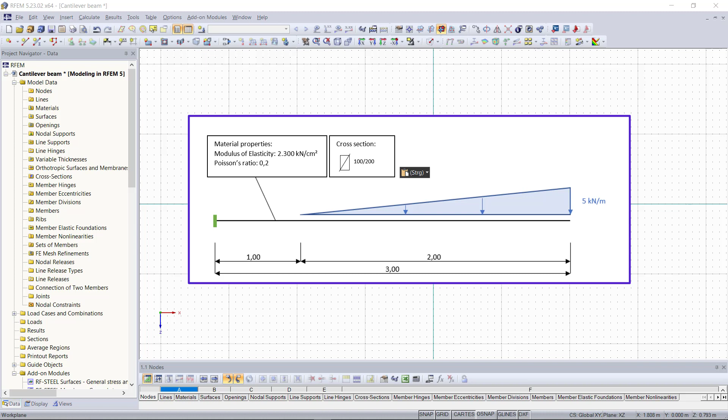Hi guys, and welcome back to our second part of modeling in RFEM. As previously announced in the first tutorial, we are going to create this cantilever beam, this time using the dialog options in RFEM for modeling.

To begin with, we can access all dialogs in the project navigator on the left side of the screen by right-clicking on the respective tabs or folders. Or we can access these dialogs using the insert menu up here as well. For instance, if we choose model data and select materials, you can see the option dialog box here. Within this tutorial, I am going to use mostly the project navigator for opening up these dialog boxes.

And again, we will start with the nodes of our beam element. For that, we go up here on the nodes folder, and with the right click, we choose the option new node. Then this new dialog appears, and just like in the first tutorial where we did use the tables for creating the nodes, we are going to enter the coordinates of our nodes depending on a reference node. This will be the origin, and we are going to place the first node here, so the coordinates of this node will be 0 and 0. Then we click OK, and we do exactly the same for the second node.

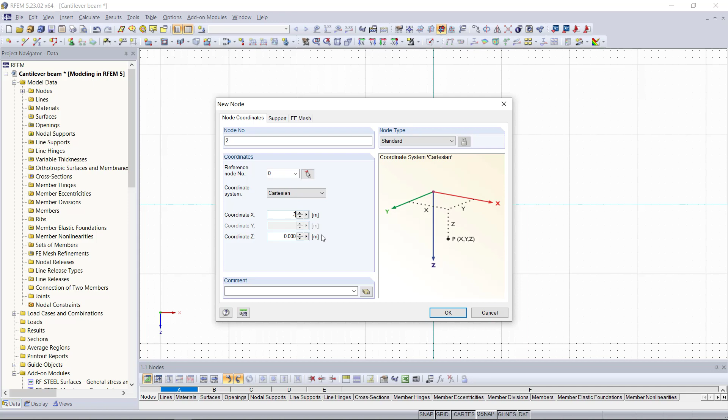Right click on the Nodes tab and choose New Node. The coordinates for the second node, we enter here 3, which defines the endpoint or the length of the beam. Again, we hit OK, and then we can see that the nodes are set in the graphical area.

So now to connect these nodes with the line in between, same procedure once again. With the right click on the Lines tab, in the project navigator, we open the dialog box for a new polyline. At the top up here, we can define the number of the line. Since we just have one line, this will be the first one.

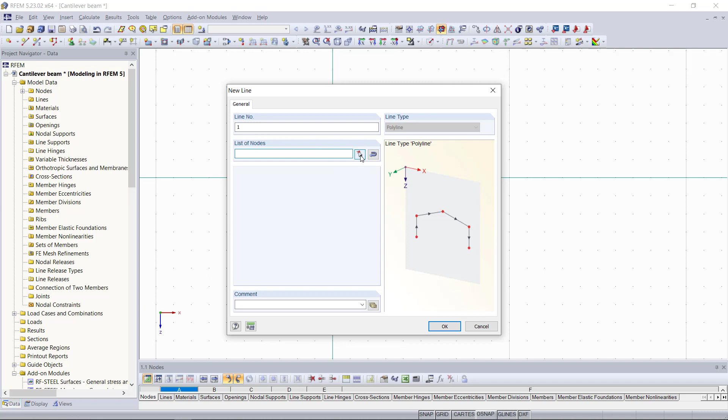In the section below, we select the nodes to be connected, and we can either type in here 1, 2 for our 2 nodes, or if you have a more complex model and you don't know the numbers of the nodes, there is also the option to select the nodes graphically, if we click here on the cursor button and select the nodes out of the graphical area.

Next, we will continue with defining a material. Let's say again, just as an example, we enter here material 1 like in the first tutorial. Then we will enter our characteristic values from that example. Again, you will notice that after entering the modulus of elasticity and a Poisson's ratio, the shear modulus is automatically determined. We can close this by clicking OK.

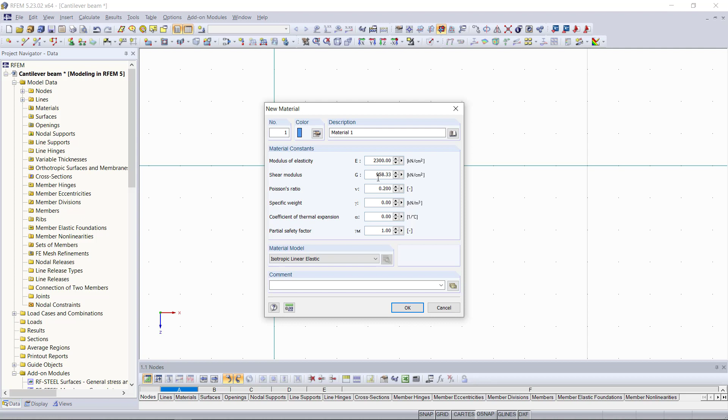Now we are going to set the supports, and once again we can find in the project navigator nodal supports, and with right click we will open the dialog for that. So a cantilever beam is one of the basic types of beam elements, and remember this type is characterized to be a statically determinate system. For that we need 3 support forces or reactions as a minimum.

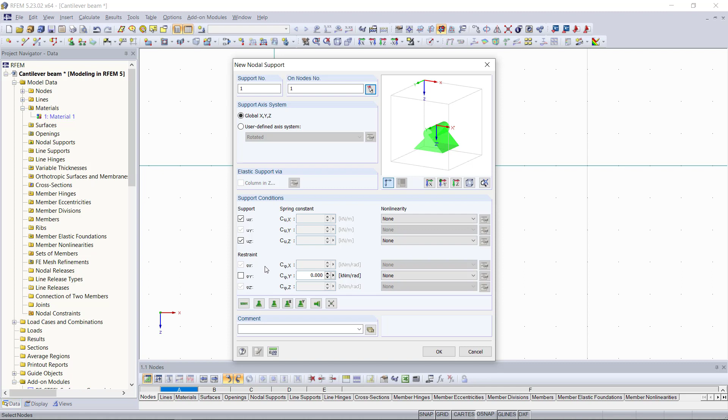Since this beam is supported at only one end, we have only one actual support here, which is going to be our first node, and at that support it has to have all of those reactions. For that, the support conditions here will restrain the beam horizontally and vertically. If we don't have anything else, it'll be allowed to rotate, and we don't want that, so we lock the rotation around the y-axis here. The graphic at the upper right corner gives you a nice visual illustration for that.

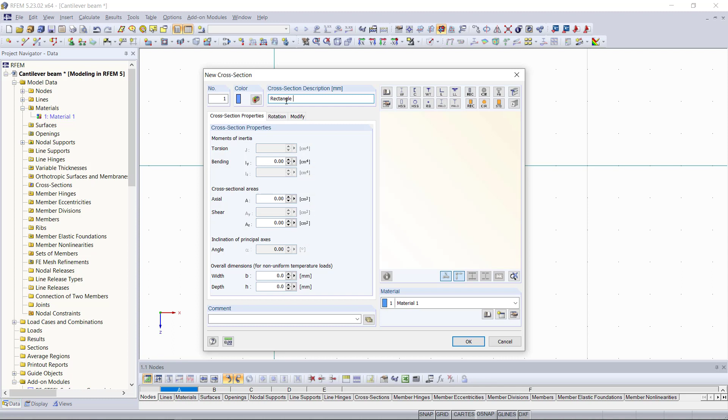Then we can click OK, and next we need a cross section for our beam element. In this dialog, we can either open up the library if we hit this symbol here, or we can just type in the cross section as well. Let's say we enter here rectangle, which will have a width of 100 and a height of 200, same as the one in our first tutorial. We can see below the cross-section properties, and down here we can choose the material for this cross-section, which will be our defined material 1.

Now that our cross-section is defined, you will notice that it's blue here in the project navigator. This is because it doesn't have a member to it yet. To assign it to a member, we can go to the members folder, and right-clicking on members, we select new member. Within this dialog, we can assign up here the member to a line. We can either type in here line 1, or once again we can assign the line graphically.

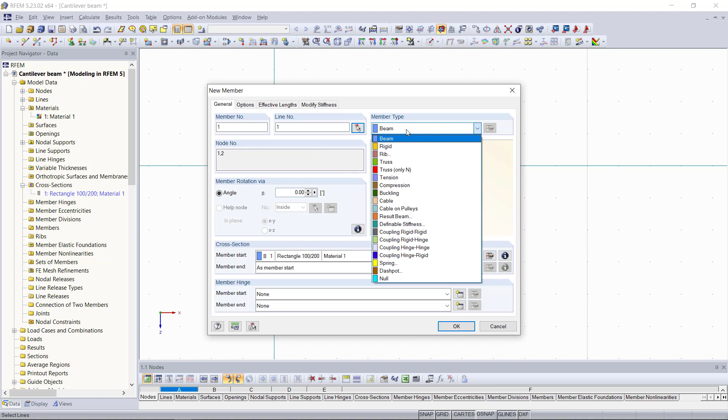Next, within this drop-down option here, we can select the member type. For now, we are going to keep that as a beam. And below that, there is the option to rotate the cross section as well. If we click, for instance, here, we can see this rotation here in the graphic on the right side. Moving on down here, we can assign the cross section for this member, and we'll keep that for the member start and the end the same.

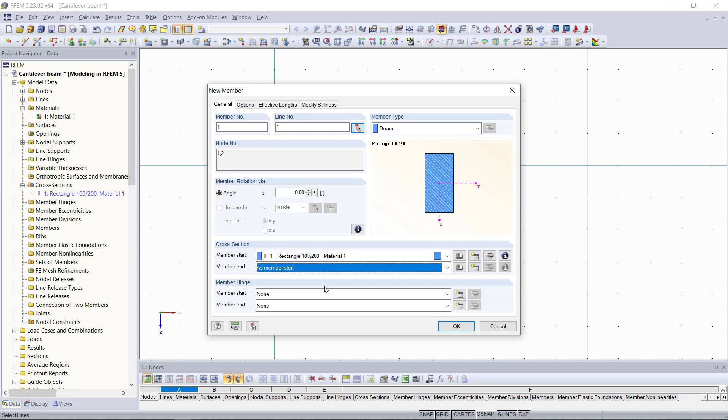We can also add member hinges, but we don't need that for this example. So we click OK, and if we turn off the wireframe model, you can see in the graphical area the cross section has been rendered.

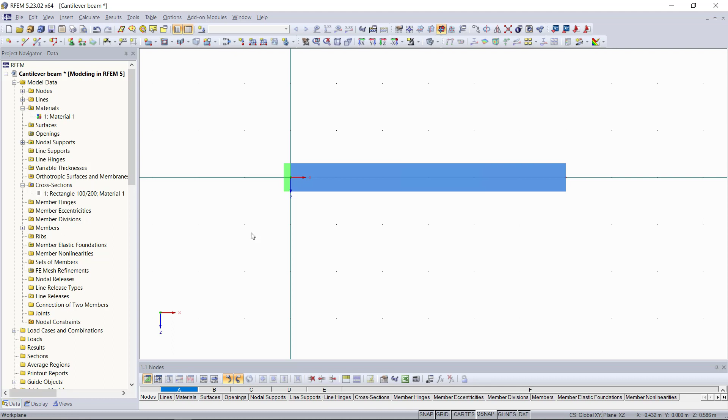Now that we have all model data that we need, we can move on to the load cases and the loads we'd like to apply. Remember, before assigning any loads, we'll have to define a load case. We can do this by going to the load cases and combinations folder in the project navigator. With right click on the load cases, we choose new load case, and you can see in this dialog the program has already created our first load case.

Within this tutorial, we are going to have only one load case, so we can keep that and choose all loads here. Then we can deactivate self-weight because we don't want that to be taken into account for the results later.

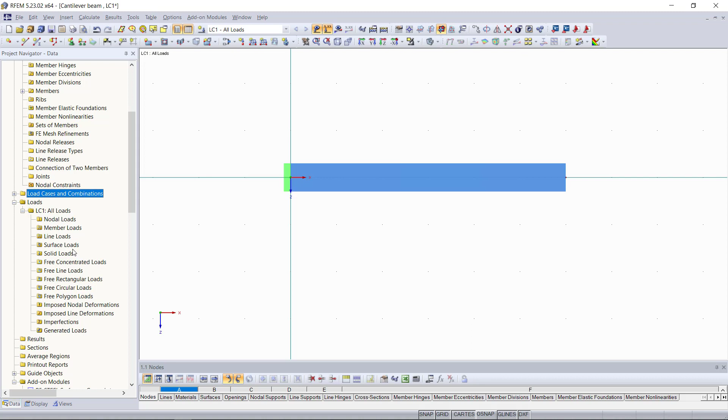Next, we will continue with the member load, and if we expand the loads tab in the project navigator, you will find for every load case that you have created a new folder. Since we just have one load case, we will expand this one here, and you can see here the options for different loads like nodal loads or surface loads and so on. We will choose a member load and open up the dialog for that.

The load type here, we're gonna keep that as force, and for the load direction, we can keep that as the global member length in the Z direction. For this example, we are going to apply a triangular load, and for this we use a load distribution of trapezoidal. We can see up here on the right side how this load is applied on our member, starting with a load P1 and ending with a load P2. We can find these parameters down here in the section load parameters.

Since we want to have a triangular load distribution, we can keep P1 as 0, and we can enter here for P2 5 kilonewtons per meter. For this example as shown, we don't want the load to be applied over the entire member length. And to do this, down here there is this option, we can turn this off, and we can set where our load will be on the member.

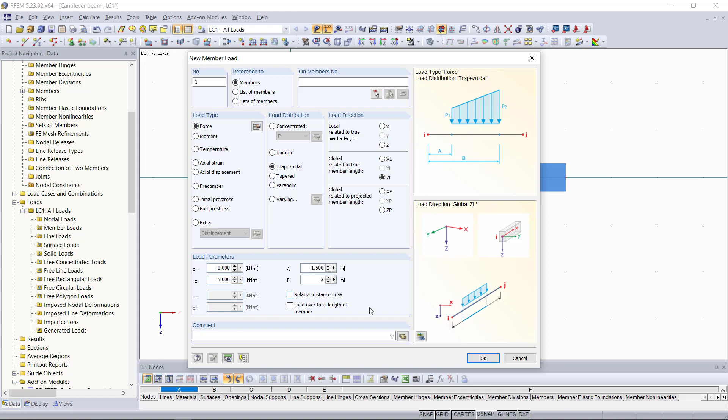So the start point will be point A. We can type in here 1.5, and end point B will be 3. Up here, we will then choose the member graphically, and we can click OK once again. Now the load is applied to our cantilever beam, as you can see in the graphical area.

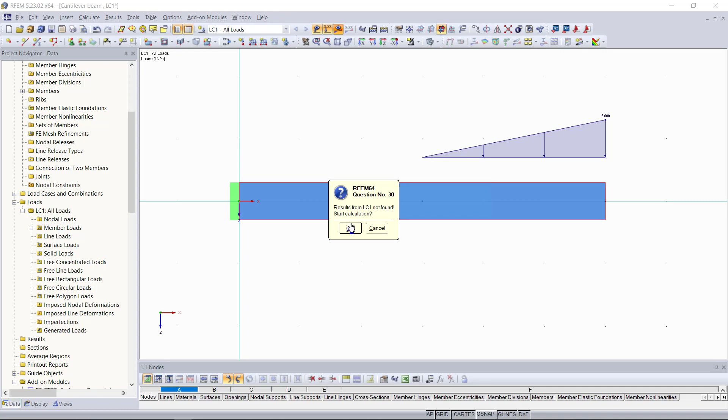To show the results for this load case, we'll go up to this button up here called Show Results, and then we click OK. Now you can see our results are displayed, and again our results tab has come up here where we can choose and display the deformations of this beam or the internal forces.

So guys, I hope this video was helpful to show you how to model using the dialog options in RFEM. In the next video, we will go over how to model graphically using the toolbar up here.